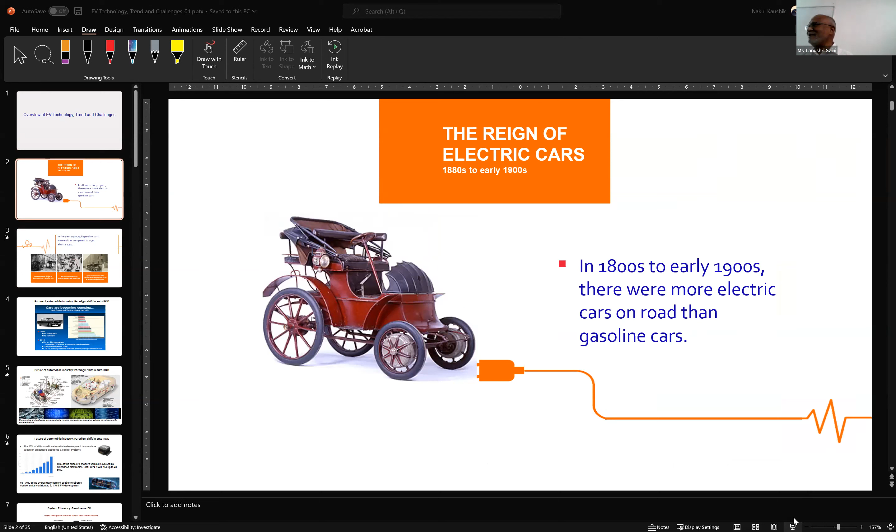What I am saying is that nearly 1.5 times more EV vehicles were there. So people were preferring these vehicles.

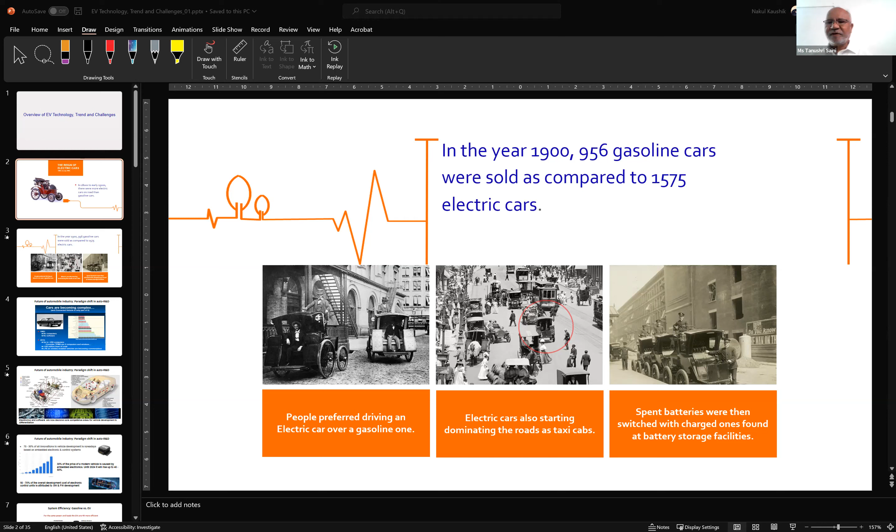Okay, move to the next one. This is only historical perspective. Next slide, okay yeah.

There is a lot of disturbance coming from that. So, one time...

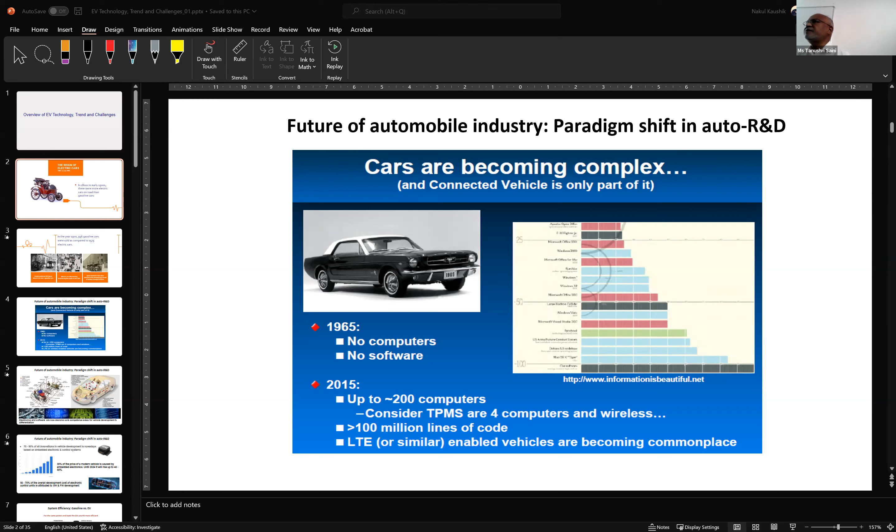If you see today's vehicle, the left side is the old vehicle wherein everything is mechanical, either mechanical, pneumatic, or hydraulic controlled, nothing electronically controlled. If you see the right side one, nothing today is mechanical. Everything is electronically controlled. Your power steering, your window control, even your tire pressure monitoring is also electronically controlled. Everything is electronically controlled, nothing is mechanically controlled today. So a paradigm shift has happened from mechanical controls to electronic control.

And electronic control requires a lot of software. So there is a shift that has happened. In all advanced vehicles, you see a lot of electronics and software.

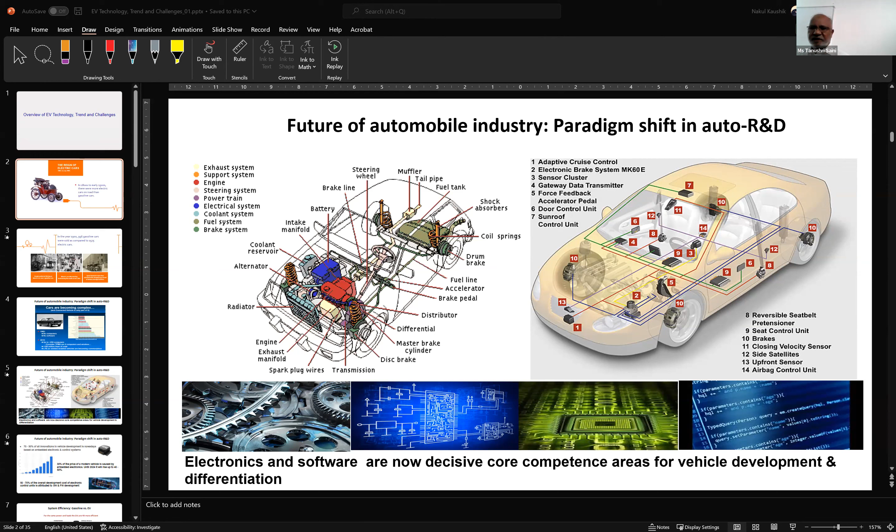So what we are seeing today is that 70 to 90% of innovations in automotive in general are happening in embedded electronics and controls. In that, nearly 30 to 40% of the vehicle cost is coming from electronics and software. Mechanical systems have matured, the technology has matured so much. Now whatever new things are coming, the costs are going into software and electronics.

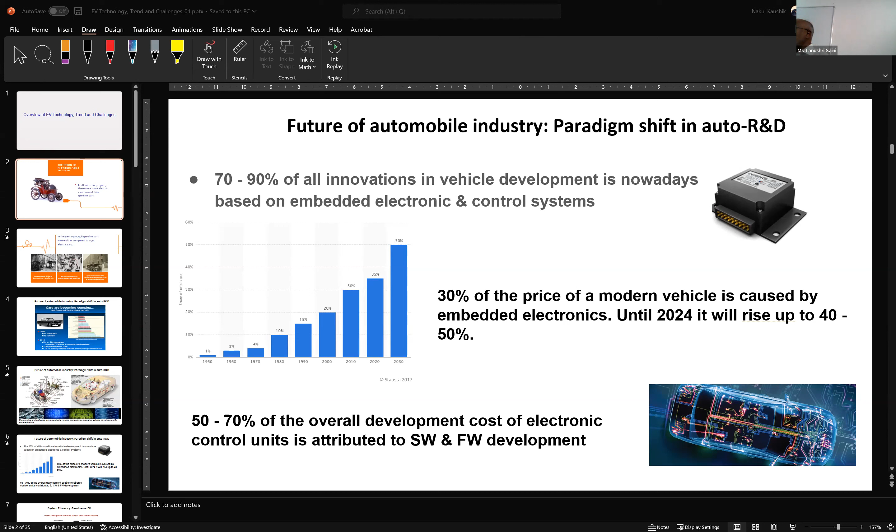The other thing in the automotive industry today, you go to any automotive industry, 50 to 70% of the R&D investments are going into software, firmware and electronics. This is in the automotive industry I'm talking about.

Whereas the EV, even in the worst case scenario, you will get around 80% efficiency. So then immediately you may ask, very simple, if it's 4 times higher efficiency, then why is EV still struggling to come into the market? Efficiency-wise it is good, only the problem is the availability of the fuel.

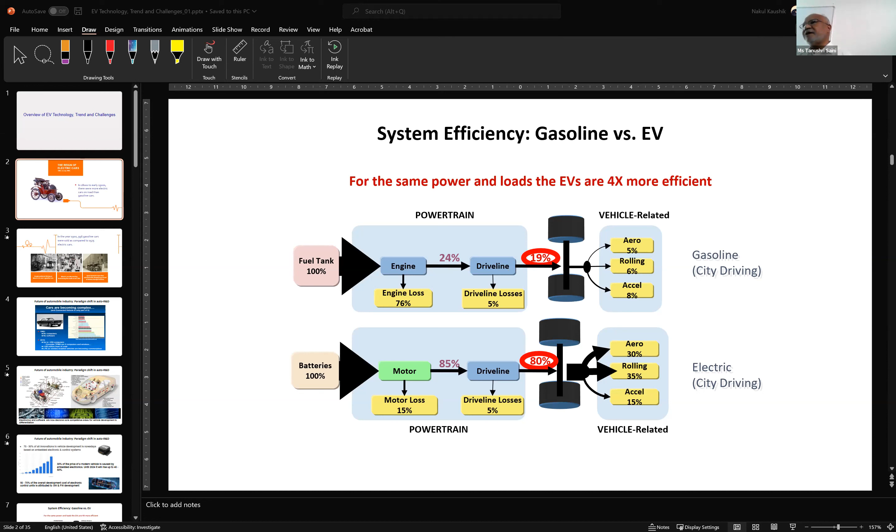Fuel is nothing but, in EVs, it is the battery. Battery cost is higher compared to the cost of fuel for IC engine vehicles, but that is drastically reducing. We'll be touching on those things in this talk.

This is possible in larger vehicles. In smaller vehicles, so much space is not available, and so much cost also one will not put in. So it will be in the larger trucks and other things that they will put that one. So you may be knowing the advantages of EV and advantages of ICE.

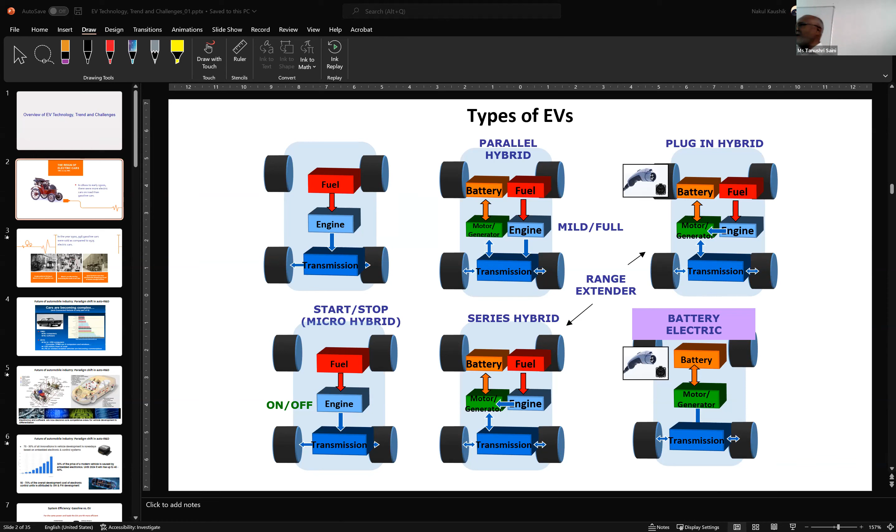And the next one is a battery electric vehicle, so there is no ICE at all there. Hope these architectures are clear. They're fairly simple architectures.

The major one is the battery, which is the fuel, replacing the fuel tank of an ICE vehicle. Then there is the ICE - in an ICE vehicle, the engine is replaced by the motor. And the motor, nowadays engines also have their engine controls, ECUs and other things that you can consider as a motor controller that is controlling the motor.

Further is the transmission. Transmission is there in ICE vehicles, there are multiple ratios there - up to 5 ratios in the gearbox. But EVs don't need that because EV is having a variable speed drive, VFD. Once you are using variable speed, you can control the speed. That's why it's normally a single ratio transmission or a dual ratio transmission, that is the gearbox.

Then the next important one is the charger, because the batteries require charging. You can have an onboard charger, but there's a limitation - you cannot have a large onboard charger because of space constraints. Otherwise everybody would put a very big charger, but space constraint is there in automotive and aerospace.

Space is very important there, right? Space, size and weight as well. So you can have a small onboard charger. That's why an onboard charger takes longer time - 3 hours, 5 hours, 6 hours, sometimes 8 hours to charge the battery.

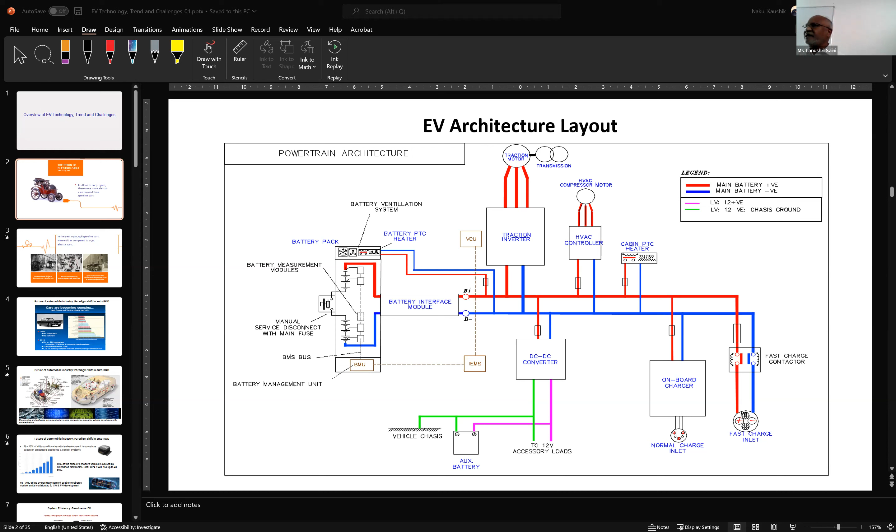Go to the next one. Now, the different types of motors available today in EVs.

You know that the hub motor is used in smaller vehicles. Hub motor is nothing but the motor directly put into the wheel. When the motor rotates, the wheel rotates and it drives the vehicle, fairly simple.

Now we can ask why the same technique cannot be used for larger vehicles, cars, buses and other things. Once it's put in the vehicle, it's very simple, so why not? Those from an electrical background understand this one.

They are all three interlinked: power, torque, speed, RPM of the motor. All three are interlinked. Power is equal to torque into speed. So that's what determines the size of the motor. Size of the motor is defined by what - speed, power, or torque? Torque. Okay, very good.

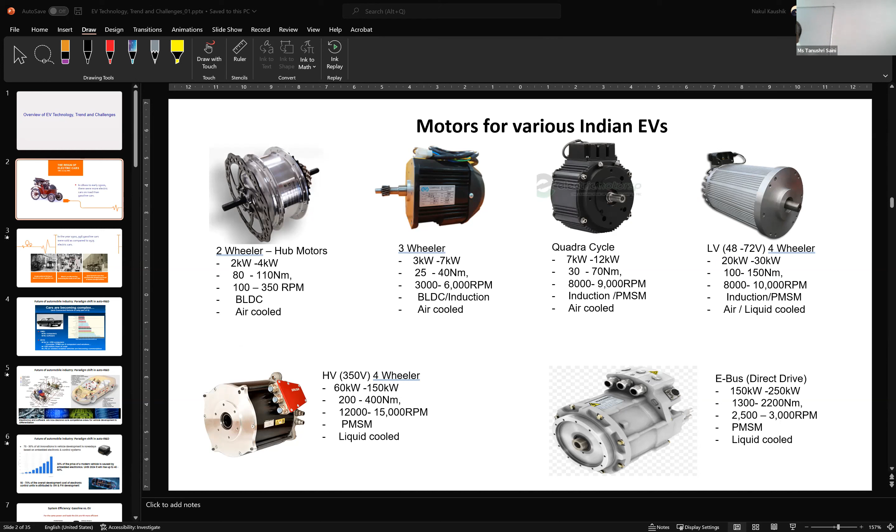There was a myth that EVs are soft vehicles, that they don't produce torque well and their performance is weak. No, it is not at all. That is totally wrong. Now people know that EVs' performance is much better.

Particularly in low speeds, their performance is much better. Their efficiencies are better, their torques are better, gradability is better - everything is better. So why is that better? I just want to clarify this, as students should be knowing this.

But unlike an ICE engine, it is like a U-shaped curve - starting very low, high speed also low, and in between there is good torque. But in EVs, you have very good torque at the beginning, and then torque reduces at high speed. That's why in high speed there is a struggle in EVs compared to ICE vehicles. But in ICE vehicles, they manage this by using different gears - they shift to low speed and high speed using gears.

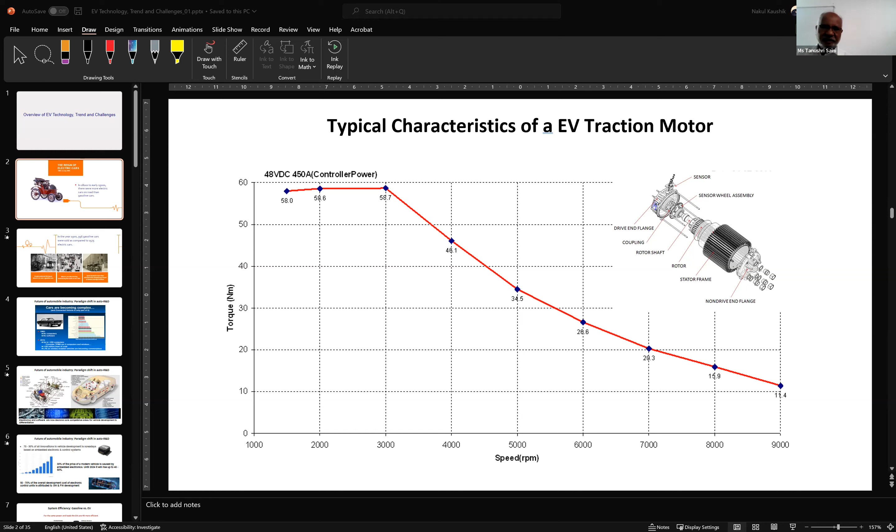So let us understand charging. How many of you think that charging is critical in EV?

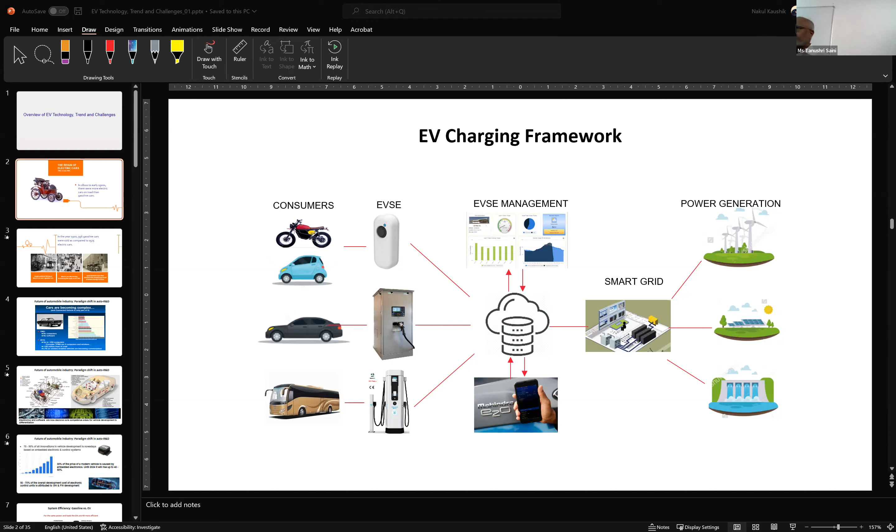So AC charging, there are standards available right now. There is single phase charging, which is what I mentioned - 5 ampere, 10 ampere, 15 ampere, or the industrial plug. Then there is type 2. Type 2 is a global standard for AC charging. Those of you from EV backgrounds must be knowing what type 2 charging is.

What is there in type 2? Can you tell what are those control signals? Anyone? Pilot? Okay, PP and CP.

Control pilot and proximity pilot - these two signals connect the grid point and the vehicle in a fail-safe way. First they check whether the grounding has become common. Then, using the proximity pilot and control pilot on both sides, which is basically a resistor-based analog circuit, it will connect, and that fail-safe connection is done. After that, power is given to the vehicle - fail-safe operation. Similarly, the type 2 3-phase is also available.

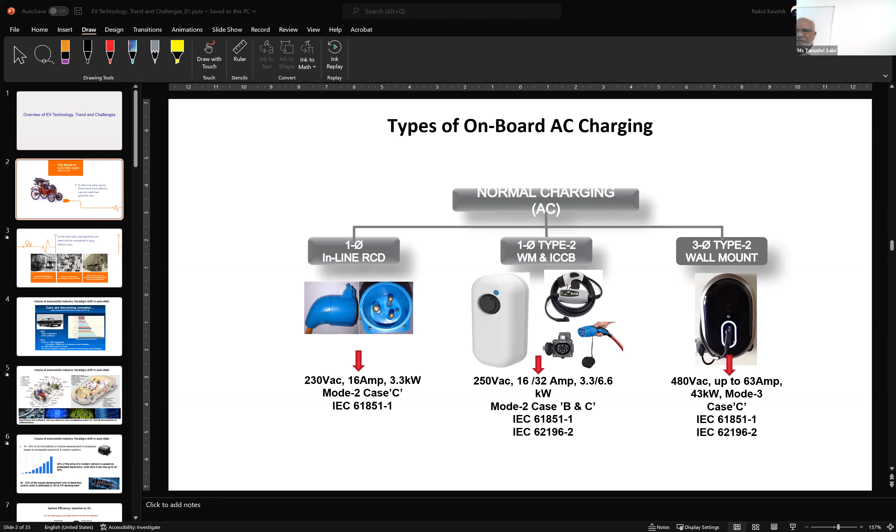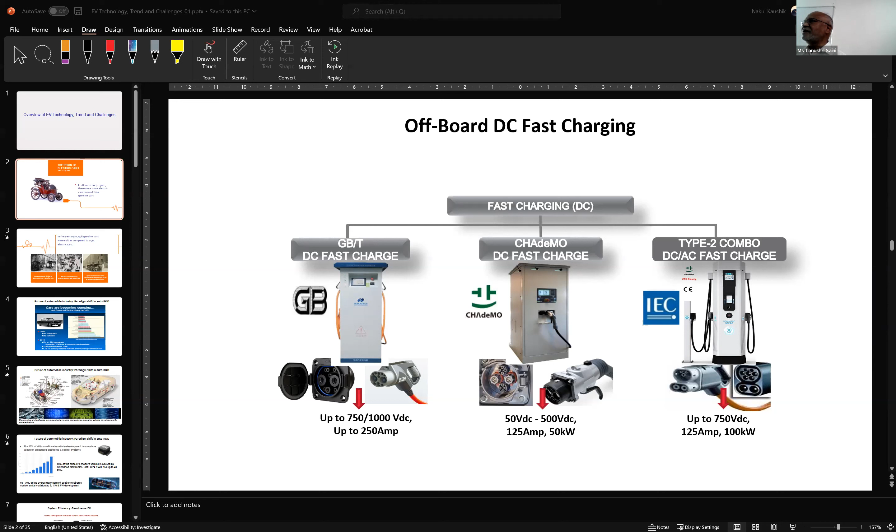Let us understand a bit about the battery system, because battery cost in a vehicle is around 50 to 60% of the total vehicle cost. That is the major one. Slowly it is reducing, drastically even. Nowadays it is coming to around 40 to 50%, but earlier it was nearly 60%. So it is still the dominant one. Let us understand a bit more.

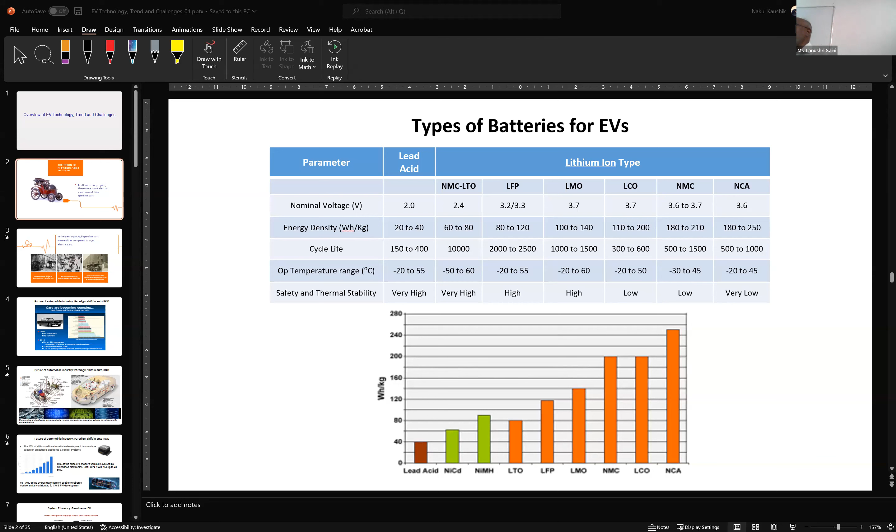So battery management system, I will not go into detail. How many of you are interested in BMS?

So unlike the lead acid battery, lithium ion batteries by nature are unstable. Lead acid batteries, when you charge them, once fully charged, automatically stop drawing current. So once fully charged, the current going inside will come down and stop. Considering that, even if you keep it charging for long, nothing will happen, it will not draw current. Whereas lithium-ion batteries, both NMC and LFP, become unstable when fully charged, and they become unstable when fully discharged as well. So when charging, you have to notice immediately when it is fully charged and stop the charging, otherwise it will go to instability, it may burst. And when driving, when it is fully discharged, you have to notice that and stop drawing current from the battery, otherwise the whole cell may get damaged, it may degrade itself, and you may not use it again.

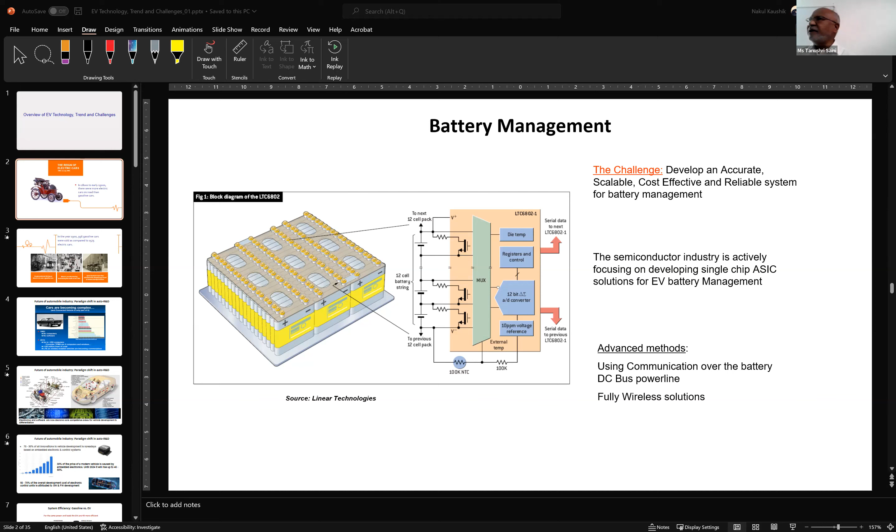So the other one is cell balancing.

So last bench, two guys, if you are not interested, you can move. Those two guys, yellow shirt and the right, adjacent to yellow, please leave, no problem. Please leave, white shirt and yellow shirt, you both guys can leave. We are from industry, not from academia, so we can take all these things. We are from industry.

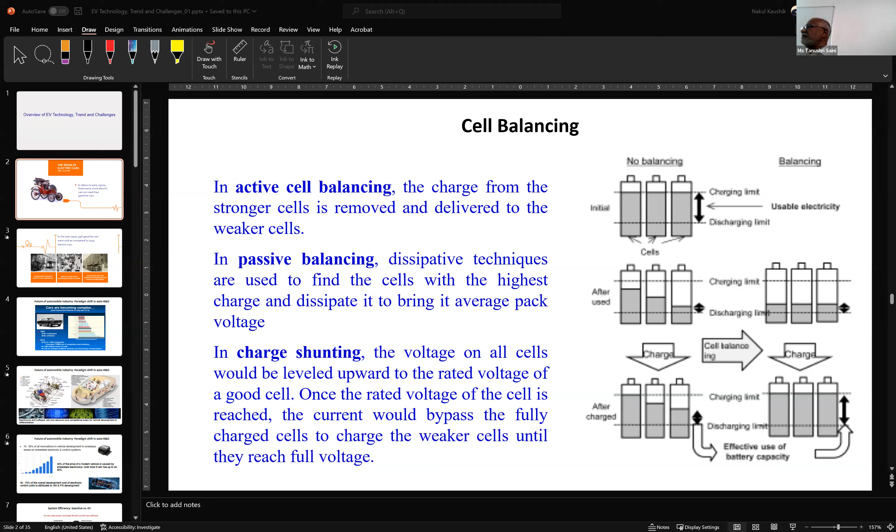Cell balancing is nothing but once charging is done, you have to see that the fully charged cell is brought down to the average charging level, so that all cells are balanced. Then charge them again so that they absorb larger energy, and during discharging also they discharge well. That is cell balancing - it is very critical in a battery system.

Go to the next one: SOC and SOH. You may know the long form - what is SOC? State of charge. SOH? State of health. State of charge is nothing but when I charge the battery, how much energy is available there. If cell balancing is not proper, it may still show SOC of 100%, but the energy available is less. When it is fully charged, it is called SOC, state of charge.

State of health is nothing but the degradation of the battery, the health of the battery. I mentioned that out of 16 cells, one cell is weak - that is identified by state of health. If I'm not getting complete 100% energy, then definitely there is some weak cell in the cycle, so I have to identify that using the SOH algorithm.

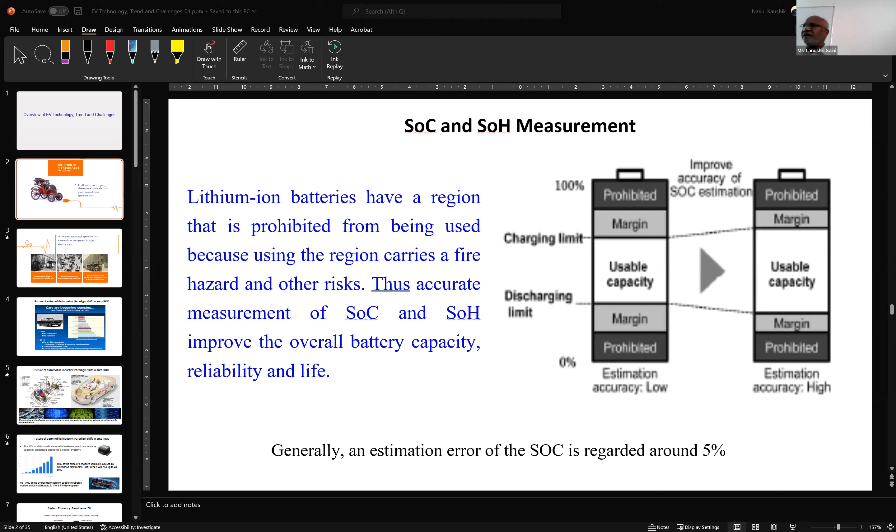How is cell balancing done? There are two types of BMS available today in the market. One is centralized BMS - when cells are small, up to 31 cells, you can use a single processor, single board, wherein all the voltages you can monitor from the single board, temperatures also you can monitor, and also current can be taken to a single board because up to 31 cells are closely located and all those wires can be pulled to this one. But once you have 100 cells in very large batteries, pulling those cables becomes a nuisance and sometimes unreliable.

In such a system, we need to have a distributed one. You have a master controller, then slaves attached to 12 cells, or 14 cells, or sometimes 10 cells based on your design - majority of the time people use around 12 cells as a standard. Each slave collects all the voltage and temperatures from its 12 cells, and you can have multiple slaves like this. From slave to master, you only have communication through CAN communication or whatever serial communication you are using - just two cables will go. So now cables will be reduced, coming to the master.

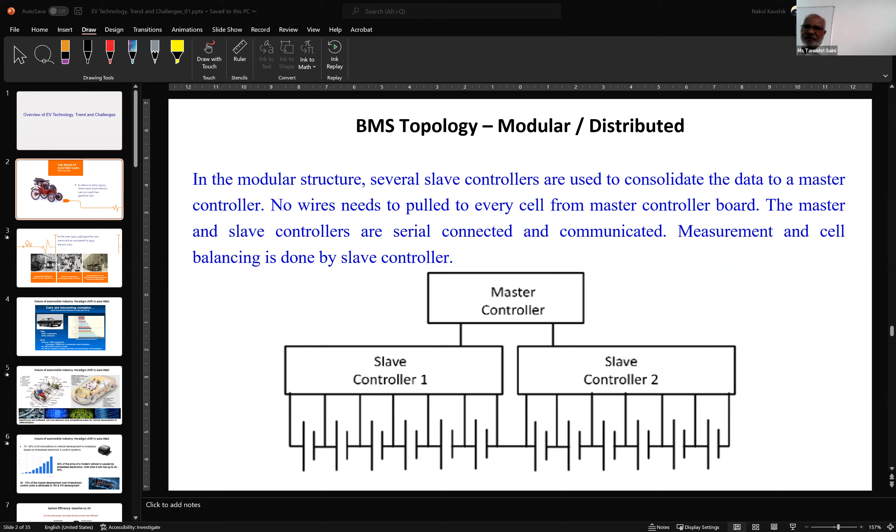In 2010, the batteries available had a density of around 80 watt-hours per kg, which was very low. Today you see 400 watt-hours per kg, so in the same space I can have 5 times higher capacity. Earlier, if I was getting around 100 kilometers range, today I can get 500 kilometers range in the same speed, same space, same vehicle.

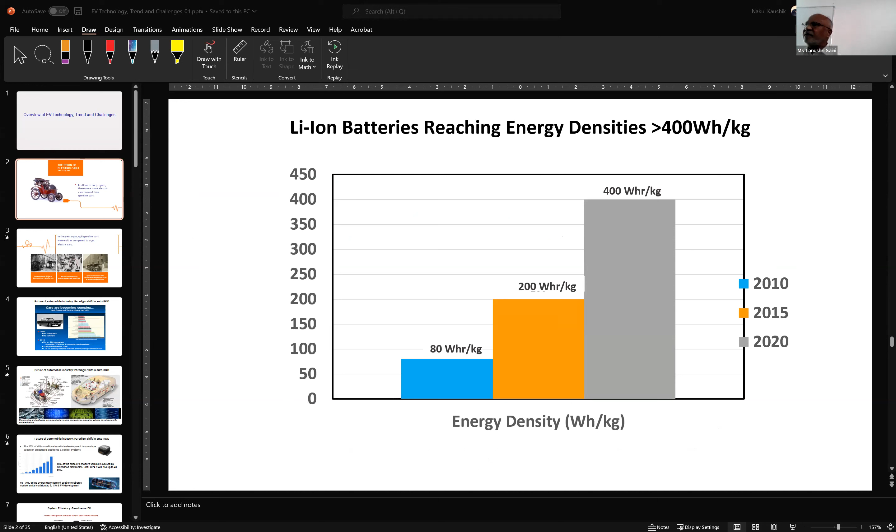Next slide shows that the cost of these batteries is declining drastically, and parity has already come.

Like solar power, which has reached parity with grid power and is now cheaper than grid power, a similar parity is coming very soon for batteries too.

Earlier it was around 750 to 800 USD per kilowatt hour. 1 kilowatt hour was costing around 750 to 800 dollars. Now it is around 100 dollars. It has drastically reduced.

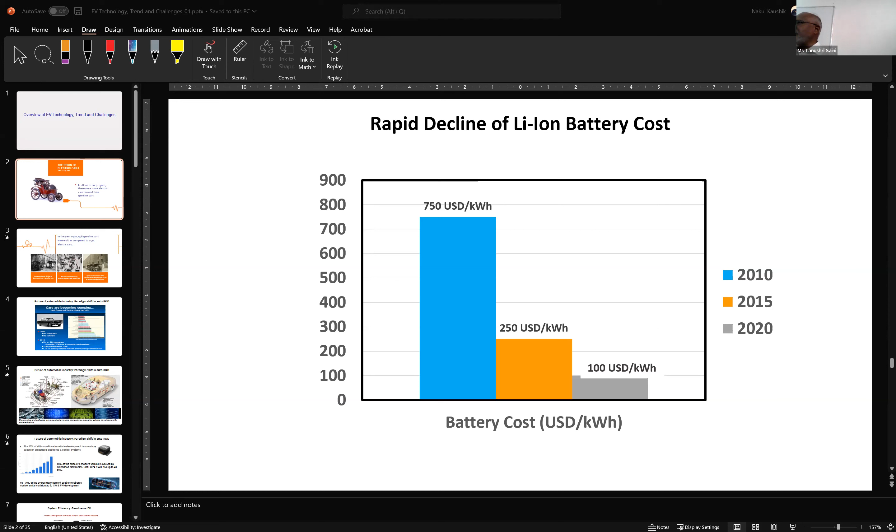Further, I'm not sure whether it will reduce because China is further increasing production and other things, and because there is suddenly a big demand for batteries, the cost is not further reducing.

Okay, let's go to the next one. I'll briefly touch upon challenges. If you are interested, we can go back to this; otherwise we will wind up here. How many are interested? Okay, interested, fine. Let's go to the challenges.

This is not about politics, just that even the UK Prime Minister is Indian now, so there's nothing wrong in showing UK here. For comparison, I have taken the EVSEs - electric vehicle supply equipment points - public EVSEs available in UK and in India.

India is a very large country, while UK is much smaller, maybe like a state such as UP or Karnataka. So geographically UK is small, but they have large numbers of charging points compared to overall India.

Indian philosophy is a bit different - once we start doing something, we do it very fast. But right now this is the state. If you see the right side slide, there is a big piece of information here for young people like you.

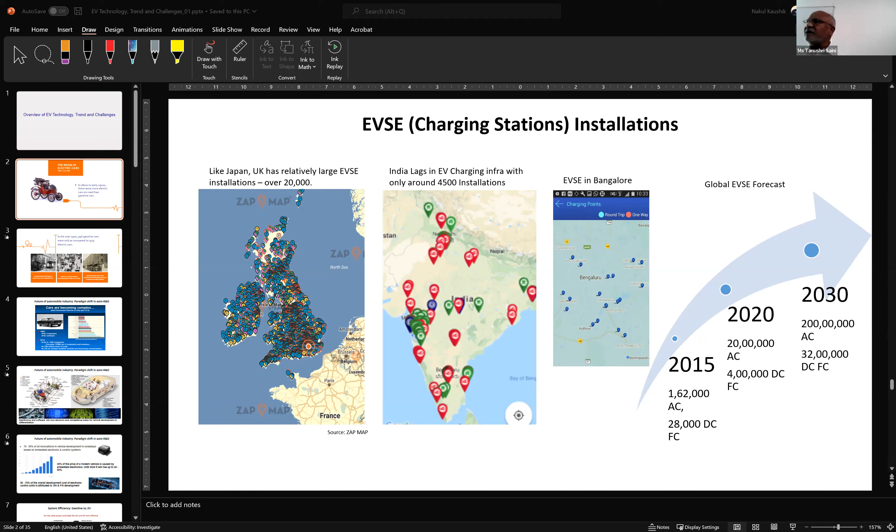We are working on it, the government is putting a lot of effort. Even this morning, I saw a DST director's message saying there is no problem with the installation of EVSEs, but there is a problem of availability of power to those EVSEs. So work is being done - let us wait for some more time and it will happen.

Let's go to the next one and understand more on the technical points, rather than putting more effort on the infrastructure, since infrastructure people are there and they are working on it.

So new technology creates new challenges. So what are those challenges? These are for the engineers to solve, for us to solve.

Okay, so functional safety. I'll ask later about functional safety. Let's first touch upon these points.

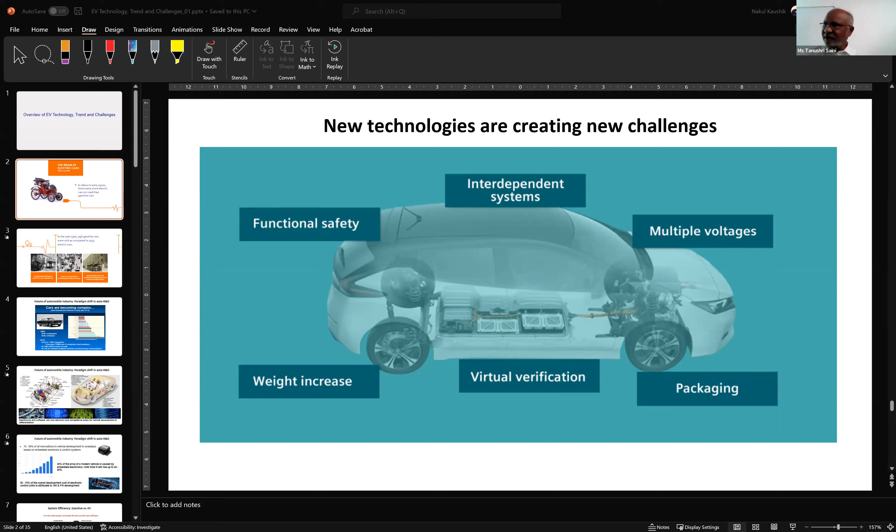Because of digital circuit failure, I have to go for fail-safe operations because of these redundancies - 2-out-of-2, 2-out-of-3, and all these things. Anyhow, it's a very complex topic, just remember the brief ones.

Other challenges: the standard wiring harness. Now with EVs and other things, the wiring harness is becoming a mess, with so many wires and so many things. In one, high voltage is there; in another, low voltage, 12 volts; in another, communication is there, and so many things. So everything is a mess, it is very complex.

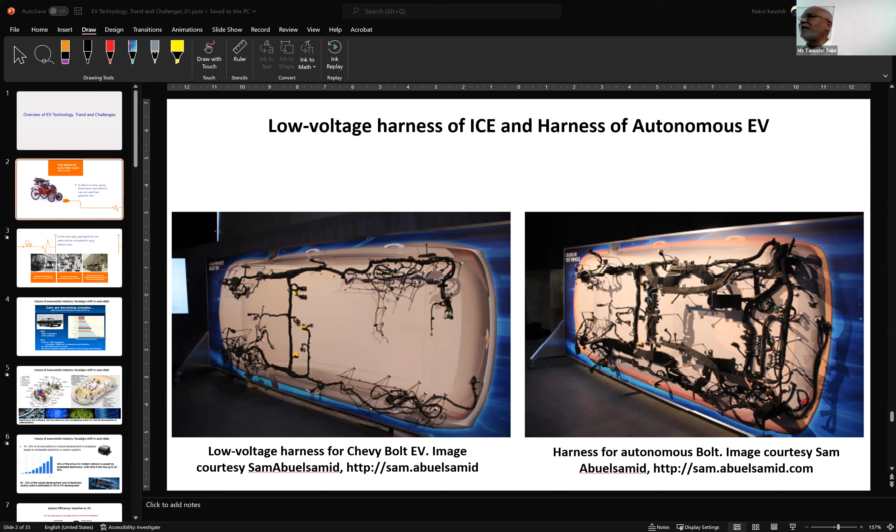Let's go to the next one. This is the real picture of an EV. Over this, you will be sitting.

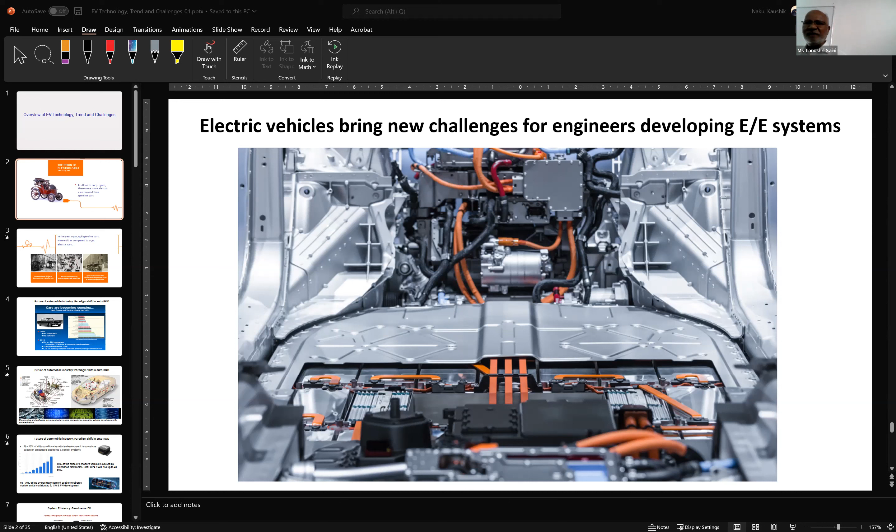So this is... all the orange ones are high power, high voltage cables. And we can see the motors, chargers and other things connected here, batteries. So it's such complex work. From the E/E side also, it is huge, complex.

Then there are many safety requirements, as I already told you. From the software point of view, you have to take care. From the hazard point of view, you have to take care. From the hardware point of view, you have to take care. If anywhere one connector is loose or open, then the system should stop. That is the basic requirement.